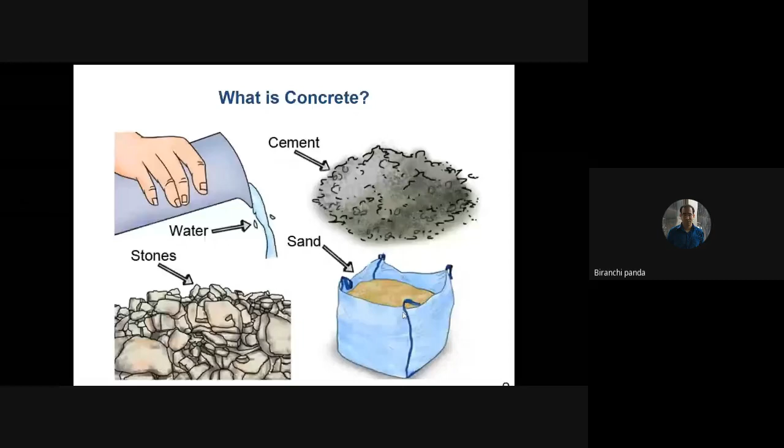Now, if you want to create a structure using concrete, what is the basic step? Normally, like in casting, we create the mold. So similarly, in civil engineering also, we create the mold to erect any structure.

So what are the problems here? We found a very interesting statistic that over the past years, the productivity of the construction industry is quite stable. It is not improving or increasing compared to other manufacturing industries.

Then we decided, how can we bring more digitalization to automate the fabrication process in construction, so that we can print our future homes more efficiently and make it also quite affordable.

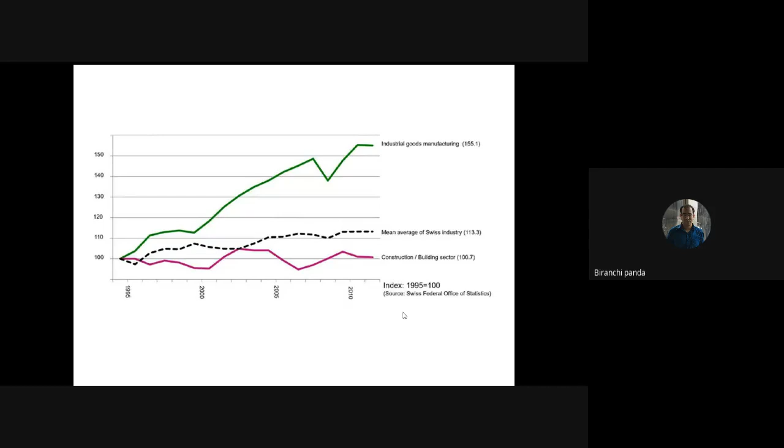Since we came up with the statistic that productivity in the construction industry is not improving over the years, we started to investigate what are the main causes behind it. We realized that lack of automation or digitalization is one of the key barriers for improving productivity in the construction industry.

Apart from that, since the building structures surrounding us are mostly made of concrete material, and concrete—especially the cement used to create it—is also responsible for global CO2 emissions, that is another main problem when you want to create something with concrete material.

The third problem we see in construction is that the laborers or workers are working day and night, exposed to unhealthy conditions which are not good for their health, and sometimes these workers who create your buildings are exposed to a very risky environment.

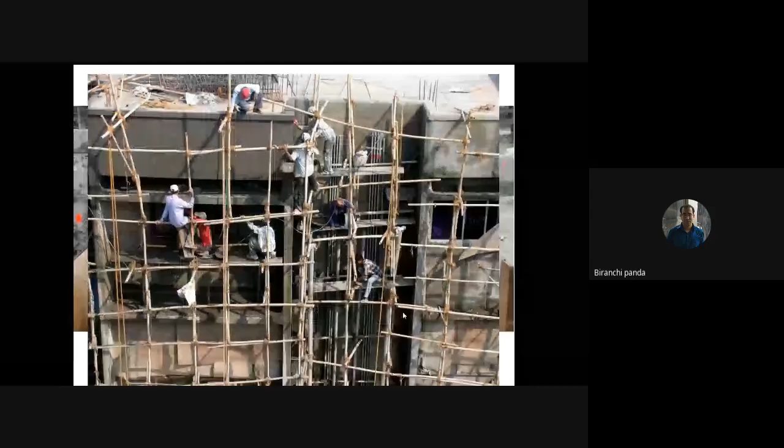With this kind of thinking and background knowledge, we started to consider how we can implement digital technology in creating buildings, so that the laborers or workers in this field can be shifted to high-skill jobs. For that reason, we started working on 3D printing of cement or concrete-based material.

So why print concrete? To answer this, I have two key points. The first benefit of printing concrete, from my perspective, is design freedom. I hope all of you know this feature of 3D printing, that we can print any complex geometry and we don't need a mold to create such complex structures. Similarly in 3D printing of concrete, we can create very complex structures—we have the freedom of design.

This picture I borrowed from a French company who were printing concrete. You can imagine the degree of complexity involved in this picture, and I'm sure it is very difficult—or I can say impossible—to create such structures using conventional casting methodology. So the first advantage we get from printing concrete is design freedom.

We can print any design and do not require any mold to create these kinds of structures, because in 3D printing we deposit material layer by layer. We just need the CAD model of the structure. Once we have the CAD model, we can directly print it, and we do not require any mold to erect this kind of structure.

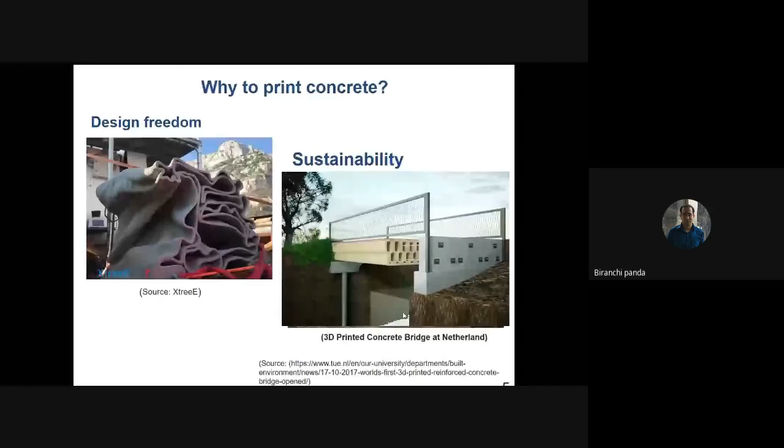This industry is a very big industry - it contributes 6% of global GDP, a $10 trillion industry. But if you look very closely, construction projects are mostly 20% over time and 80% more costly.

Today, if you want your own building, you go to the builder, they will quote some price, suppose X. After 2-3 years, sometimes the estimated time duration cannot be achieved, and due to overtime, the building prices become more expensive.

If you look into the reason behind these price fluctuations, you can see we have very few automated devices used in construction. If you see the percentage of robotic systems used in our constructions, only 0.2% robots are being used. That said, there are many advanced equipments construction people are still using.

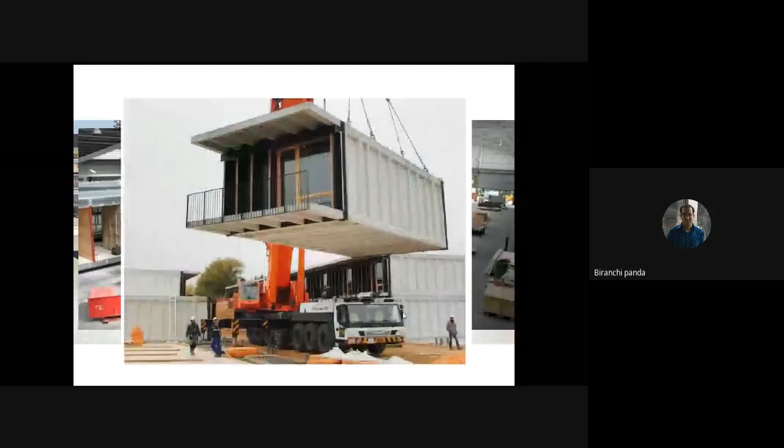We have some machines that can simply lay down bricks. We have machines, or a factory of the future, where we can create the entire building - an example of precast companies entirely building the structure, and once ready it can directly ship to your place for installation and use. It's a very simple and affordable way of making concrete structure - everything you need is created in a factory, and once ready, you directly install it on site.

To track the progress of construction planning, management, and costing, we have also been using advanced software called building information modeling, where all these progresses are captured.

Recently, as I was mentioning, the World Economic Forum presented the scenario of the future of construction, where all these automated techniques will be connected to the internet through IoT devices. If you look closely into this picture, you'll find that 3D printing or additive manufacturing is also considered one of the future technologies to be implemented in the construction sector.

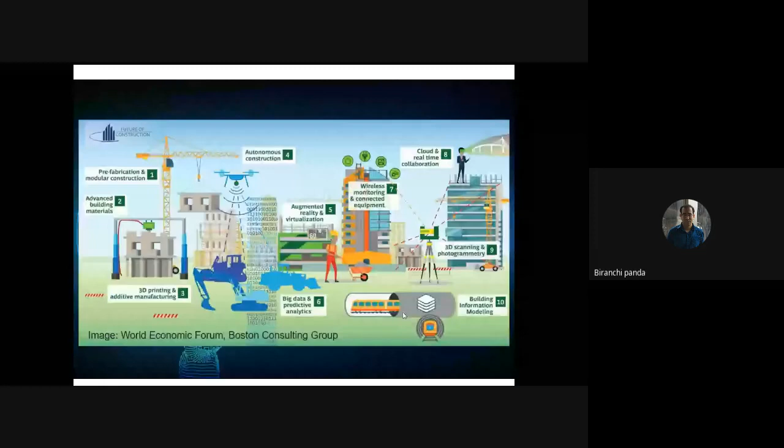So let us come to 3D printing of concrete structures and understand how it works. Before I start, let me play a very short video - almost 80 years old - but you can get a feeling of concrete printing just by watching it. Let me play it for you. I hope you are able to see it.

On October 20th, 1941, he applied to the U.S. Patent Office for registering a patent for a wall building machine.

The person whose time was devoted to the invention of equipment for the food industry is the author of the first building 3D printer. He created a prototype. So you can see that 80 years back, these people already knew 3D printing.

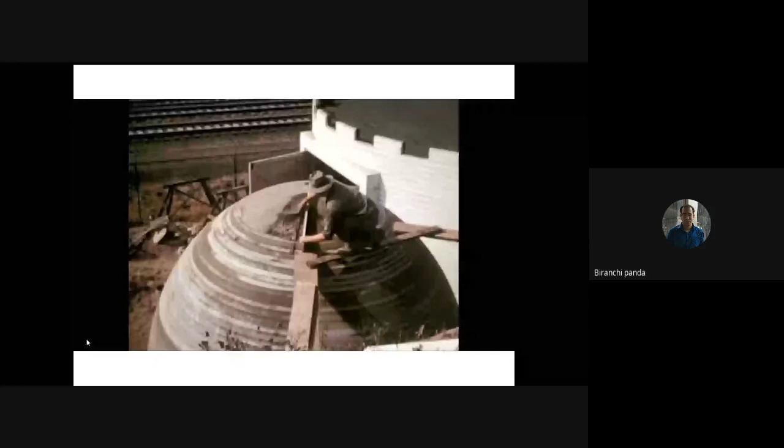They could create structures using a machine that deposits not concrete, but something similar to soil or mud kind of materials, layer by layer.

After 80 years, if you look at the same scenario, it looks something like this. This is a company, Apis Cor, from Russia. They claim to have an advanced 3D printing system that can print an entire building in less than 1 day. I'm not trying to humiliate any companies, but at the same time, I'd like to mention that in 80 years we've only improved our mechanical machines.

The machine they were using earlier had a lower degree of freedom, but with this kind of crane-like system or robot, we have more degrees of freedom. So in terms of machines and instruments we have improved, but the underlying technology remains the same. Even now, the construction industry is adopting this kind of technology.

We started working with this concrete printing technology. I'll show you one video, but before that, let's look at the schematic of this concrete printing research. When I started my PhD in 2015, there was a lot of interest from both academia and industry to work on this topic.

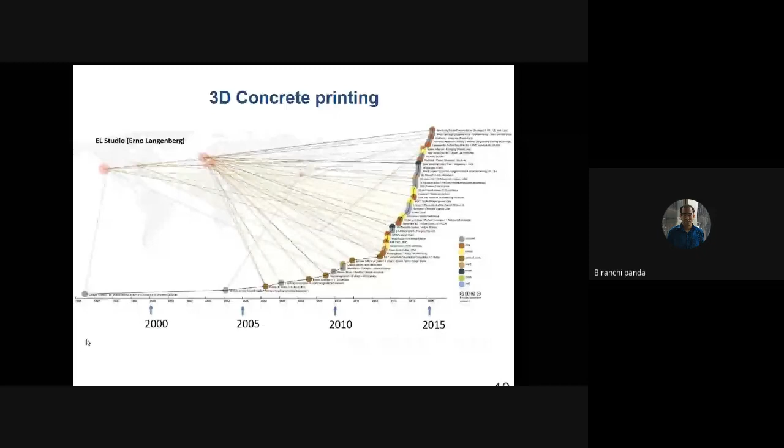The industry was trying to adopt this technology because they found it could help create affordable homes compared to regular casting methodology. So this is the video of concrete printing. Let me play it. It is similar to an FDM based technology.

Those with a 3D printing background can easily see that it's similar to fused deposition technique, where we deposit the concrete layer by layer. It's just like the FDM process, where we deposit molten plastic layer by layer. Here we don't need to melt it, but concrete by its own nature can be molded, and we can deposit it directly from the CAD model.

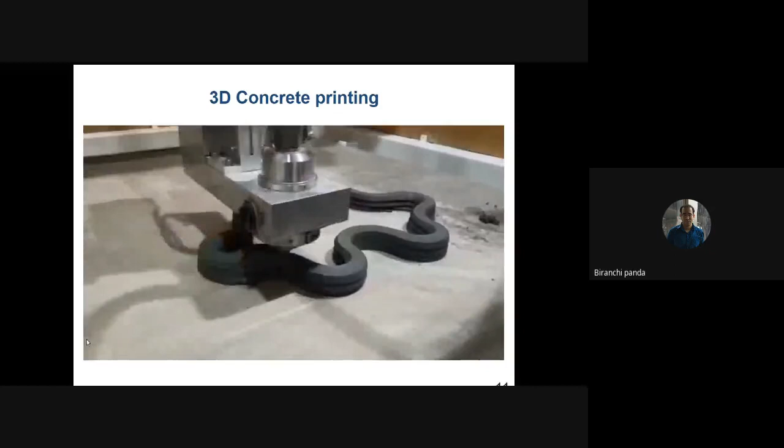So the process starts with a CAD model. This is the printer we used to print this structure. It's a customized machine, because when I started my PhD, there was no machine available for printing concrete, so we made our own.

It is a 4-axis gantry printer. The X, Y, Z axes are visible, but there's also a rotational axis, you might have noticed the nozzle rotating during printing of the structure. We count that as the 4th axis, so this is a 4-axis gantry kind of printer.

It's a very simple process, but let's look at the challenges when you want to print this kind of material. These challenges are very common even in fused deposition modeling, or generally in all kinds of extrusion based 3D printing processes.

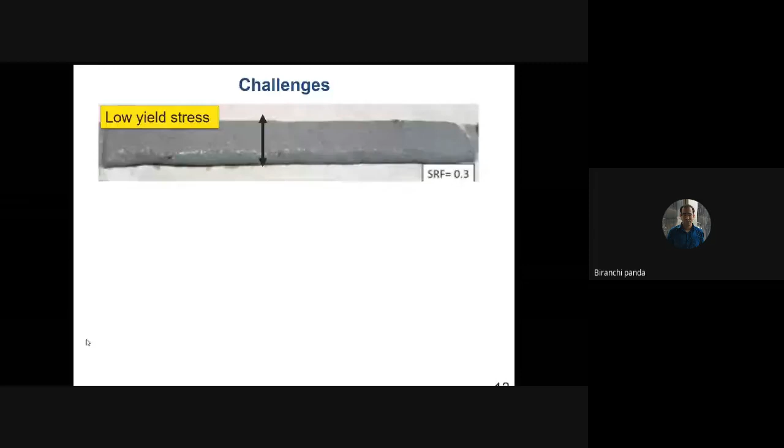So with some chemical modifications, we can create a slightly more stiff mix for this printing application. When you make it more stiff, we'll see that because of high viscosity, the layers will be discontinuous in nature. When you are printing, it will be fragmented.

So neither do we need the material to have a very high yield stress or viscosity, nor a low yield stress, because when you have low yield stress, it will simply flow away and not retain its shape. And when it has high viscosity, you will get discontinuity in layers. So we need to have an optimum material combination to print the material.

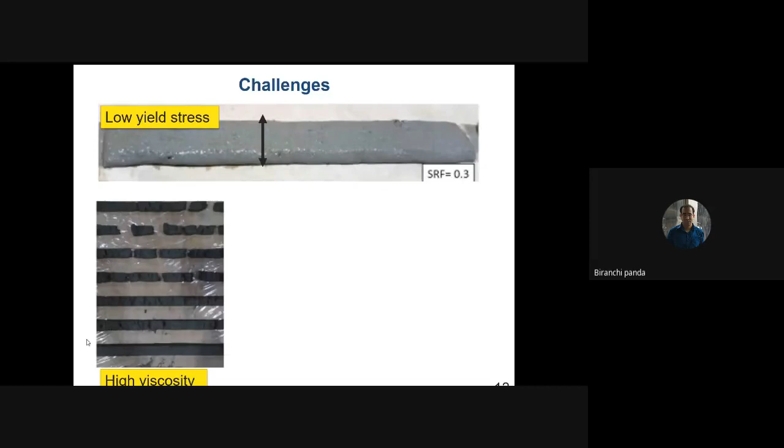So we have to properly create a balance between yield stress and viscosity, and thereby come up with a printability window where these mix combinations will be printable. When I say printable, it means the material should be extrudable while maintaining its own shape, and buildable. We need to also deposit more layers. So how can this be done?

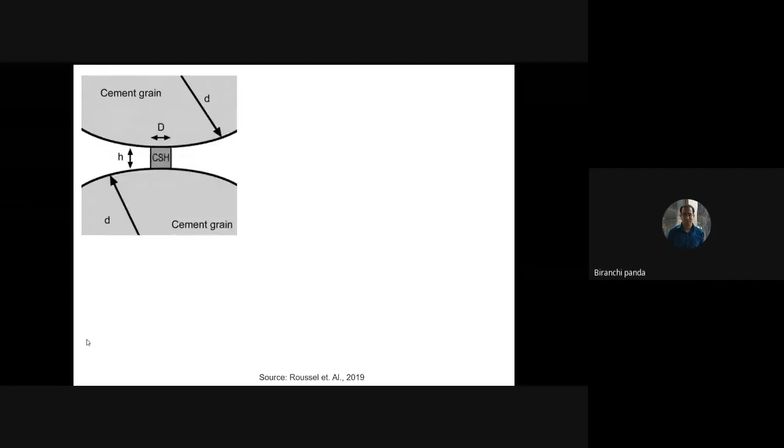Normally for regular construction, we use Portland cement, or simply cement. Cement has its own mechanism to create this kind of thixotropic material. I am not going to explain this complex keyword now, but I have some supporting slides, and in the subsequent slides I'll explain it in a better way. Cement has a property where if you simply use cement, you can deposit some material, and to deposit more layers, you need to always control the yield stress of the material.

But our goal was to create a more sustainable mix design. So when we wanted to create a more sustainable mix design, we tried to identify what waste materials are available near us. Then we came to know that we have a power plant that produces fly ash, and when we look at the fly ash under a microscope, it looks like spherical balls.

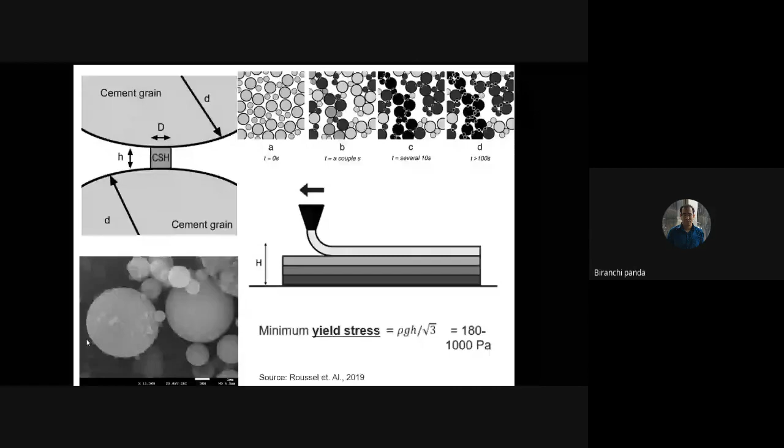So we tried to replace cement, because as you know, cement production is an energy intensive process and it emits a lot of CO2 to the environment, which is not good because it causes greenhouse emissions. So we wanted to replace cement partially with fly ash because it is an industrial waste, and we also wanted to create a more sustainable mix design.

But as I said, whenever we saw this fly ash under the microscope, we could see that the particles are like spherical balls. So what happens when you want to replace cement with fly ash? Because these are ball-like spherical particles, they have a high tendency to roll over. They can easily flow away. So ultimately, when you replace cement with this waste material called fly ash, having spherical particle size, they can easily flow away.

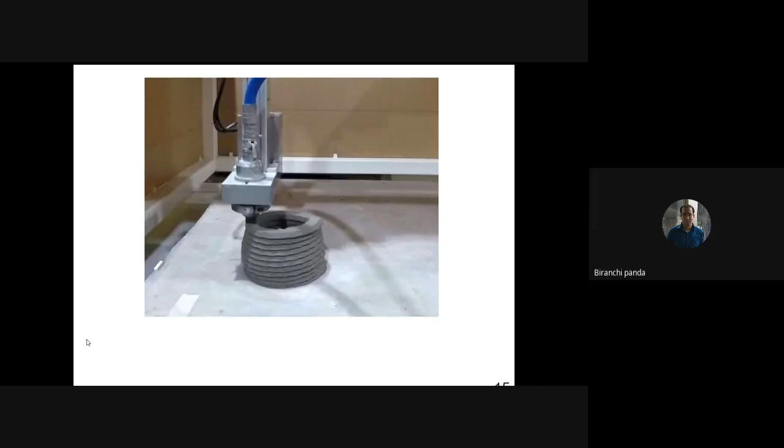So after deposition of 3-4 layers, the whole structure is going to collapse. As you can see in this video, because of the high flowability or low viscosity, this structure is going to collapse. Even when we tried other structures, after printing a few layers, the whole structure collapsed.

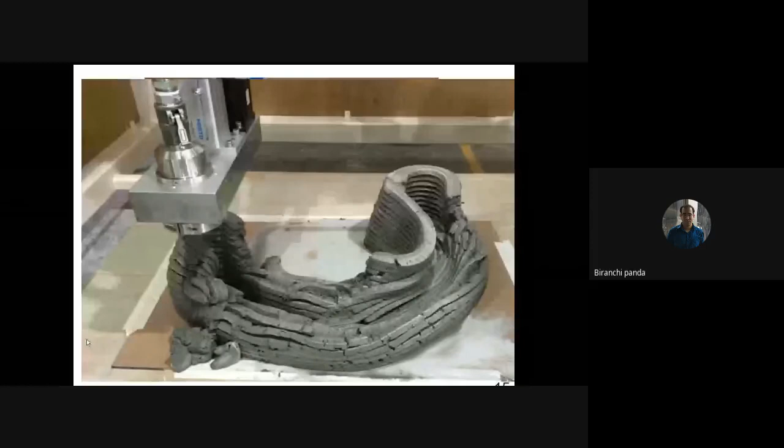So to improve this problem, to improve this material combination, we tried to take the help of nanomaterials. Nanomaterials, though they are nano sizes, can do a very wonderful job. So we used a customized nano clay. We made this nano clay ourselves.

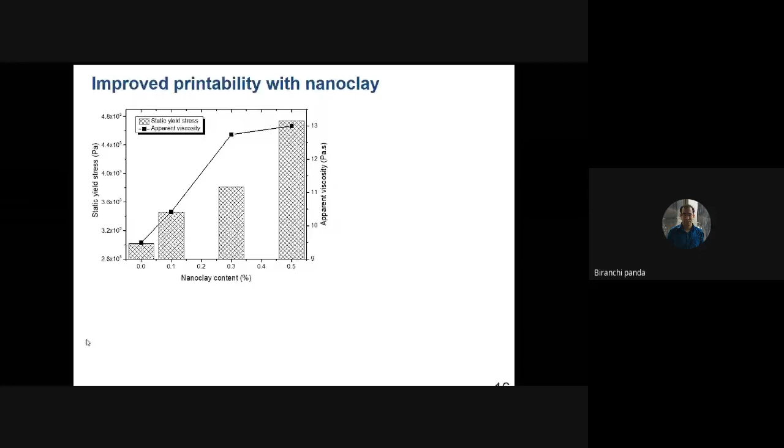We investigated the causes of why it got improved, and found there is a mechanism called flocculation. Because of that, these nanomaterials are able to improve the yield stress of my control sample. The sample I printed before collapsed, but now the same material has more yield stress and more viscosity, yet it's still in the printability zone, meaning I can print it without any discontinuity. There's a mechanism I won't explain in detail, but flocculation is happening here, providing the material with higher yield stress and viscosity.

Let us understand the process in more detail. During printing, we initially start with a mix at the mixer. Once you mix the material, it is at the mixer. Then we need to pump it, because the material needs to travel from the mixing point to the extruder or nozzle. So the next stage is extrusion, where we have a pump and we extrude the mix. After extrusion, we deposit it. So there are basically three stages in this printing process: rest, extrusion, and deposition.

Deposition is also counted as rest, because once you deposit the material, it is in a resting condition, but with time the material gets loaded with new layers. So there's a slight difference between the first and last stage. In the first stage, the material remains entirely in resting condition, but in the last stage, though we are depositing the material, it's not purely in resting condition because we keep adding layers. So the material in the bottom layer is exposed to some stress because of the top layers.

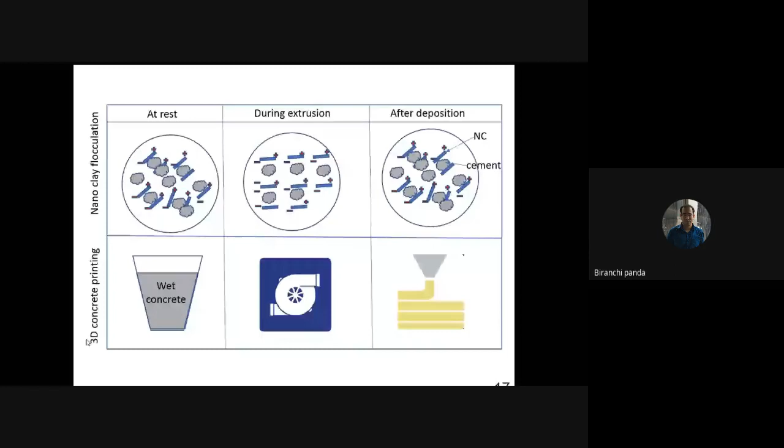We have to make this possible for printing cement or concrete based material. That was the main challenge while developing the material. But as I mentioned, with the help of nanomaterials, we were able to print more layers without any deformation. When the concrete printed layers started to deform, we classified their deformation, again taking the help of strength of materials.

Every time we work with a new system or new material, we always try to connect with a fundamental mechanism, whether from strength of materials or machine design. So we categorically say that the deformation process in the beginning is elastic deformation, but once the material crosses its own yield stress, we expect it to have plastic collapse.

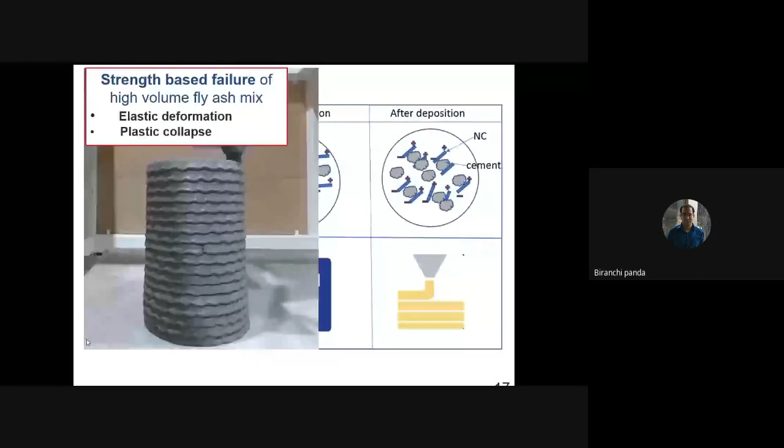To measure this deformation, we modified our printer. We attached a laser sensor to the extruder so that during printing, this sensor measures the deformation of the layer. This information is really helpful because we developed a feedback control system. When the material is going to deform, the laser gives me real-time data, and with that data I can optimize the material design and the printing parameters to reduce the deformation. This is like process control, improving how we can accurately map what's happening during printing and what changes are happening because of the material or the machine.

If we're able to capture it, we can design a better material and a better machine for printing a very tall structure. That was our goal. So for that, we made some modifications at the printer level, and then we were able to print the material.

As I discussed, during printing there are basically two stages: during extrusion and after deposition. During extrusion we need low viscosity material, and after printing we need high viscosity material. How is this possible? It's possible when you design a thixotropy material. What is thixotropy?

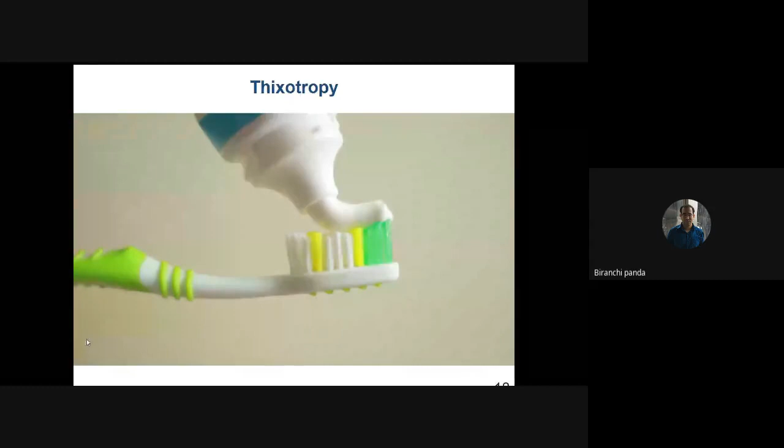So how do we measure this thixotropy property? It's a very simple process - we developed two protocols to measure this property. I just explained two points: one, you have to apply pressure, and when you apply pressure, force, or shear rate, the material loses its viscosity - it gets broken down. So first we classify the protocol name as structural breakdown. It means we'll see how different mix designs can be broken down under certain shear rate.

So for that, we developed this testing protocol where we apply high shear rate and see how the material breaks down. We can see from this image that there is initial shear stress, and once it completely breaks down, we have the final shear stress. If you take the ratio of this, you get an index, and this index tells you how fast you can destroy your material.

It is important because if you remember the 3-stage process, during extrusion we need the material to break down very easily, so that we have to apply low pumping force or pressure to extrude the material or deliver it to the nozzle. So this protocol or index helps you select your final mix design, which requires less pressure for extrusion. Now, since printing is not just about extrusion, we need to deposit more layers.

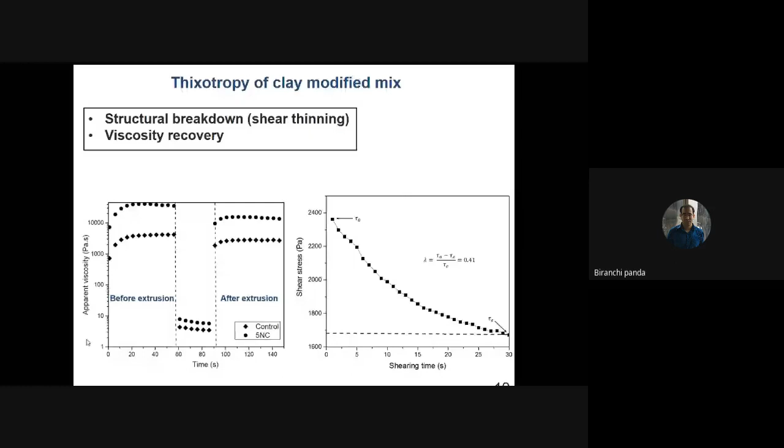So it is still well and good for our applications. We can deposit the material without having the behavior of flowability, because during extrusion the material completely loses its viscosity, but after extrusion it can recover its viscosity, and with this high viscosity we can print layers without any deformation. So whatever material we develop, we have printed more than 60 layers, and this is a very tall structure that we printed for one of our projects.

That project I am going to show at the end of my slides. So this is all about material development.

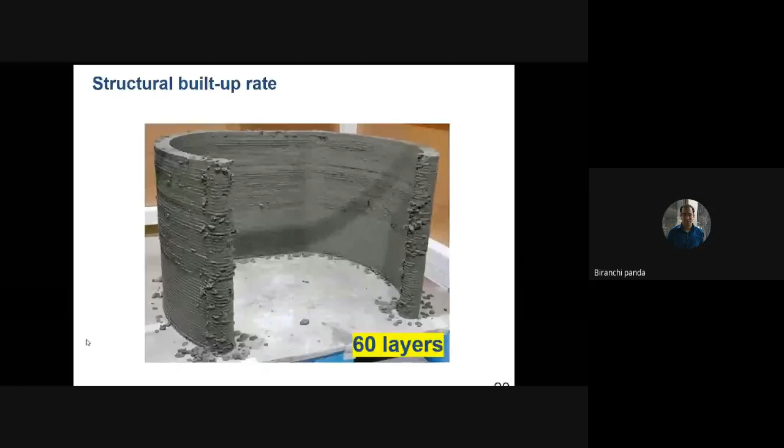Then we wanted to do some more experiments from a machine perspective. We came to know there is a competition by NASA. They wanted to develop a material to print habitats, or homes, for astronauts traveling to Mars or the Moon. The requirement was, how can we automate or digitalize this fabrication process? But the condition was the material should be developed in such a way that it needs less water, because in those environments we don't have the availability or freedom to use a lot of water.

So the key criteria was to develop a material that needs less material, less water. For that particular application, we developed a geopolymer material. Again, it's a more complicated matter, so I'll quickly skip these slides. But before skipping, let me give a very brief introduction to this material development.

So here we used some fly ash, GGBS, and some basalt material, since we came to know a similar composition was available on Mars - that information was provided by the competition organizer. We used basalt kind of material and made sure the compositions are similar to the material available on Mars. Then we created this geopolymer mix, where the activator or chemical component is used instead of water, since here we don't need a lot of water.

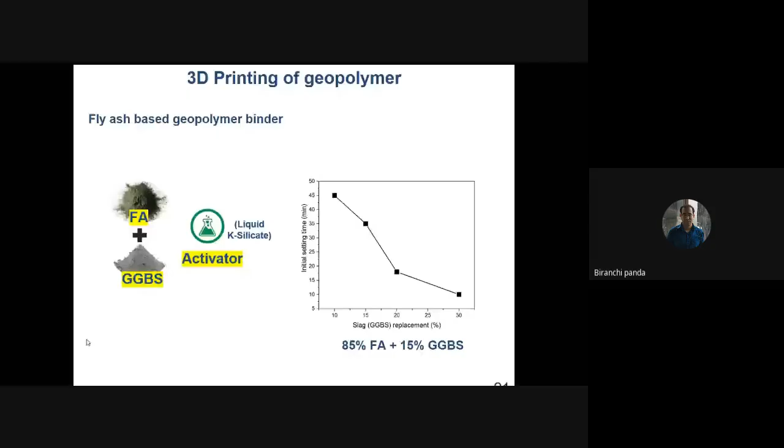Instead of water, we need an activator, which is potassium silicate, and we use this potassium silicate to make the concrete material, using byproducts like fly ash and slag. These come from different steel plants. And we investigated how we can design a printable mix design using this material.

Then we realized that the activator we use in our process is the main culprit, because activators are available in different concentrations, or different molar ratios, and different molar ratios of activator have different viscosity. As you can see in this picture, if you take 1.8, it has low viscosity. If you go for 2.0, it has high viscosity. So the activator viscosity is controlling the viscosity of my final material.

As you can see in the top two pictures, different viscosities of the two materials have been recorded. When you use an activator of high concentration, you end up with a material of high viscosity. When the material viscosity is good, you can print a very well stable filament. But in the case of 1.8 molar ratio, since the viscosity was quite low, we can see that after extrusion, the layers are simply flowing away.

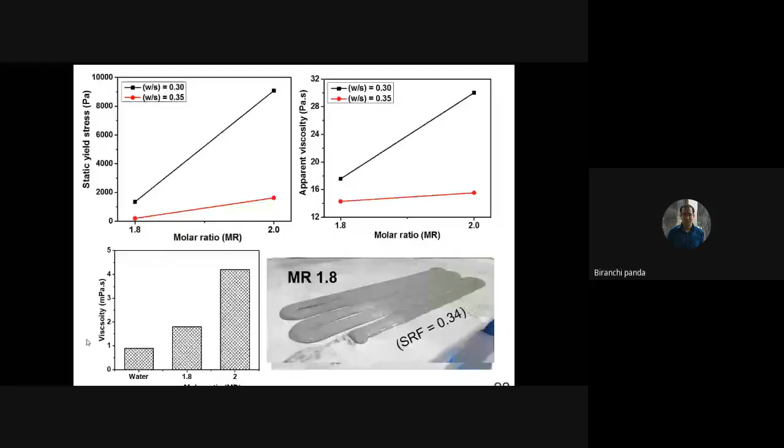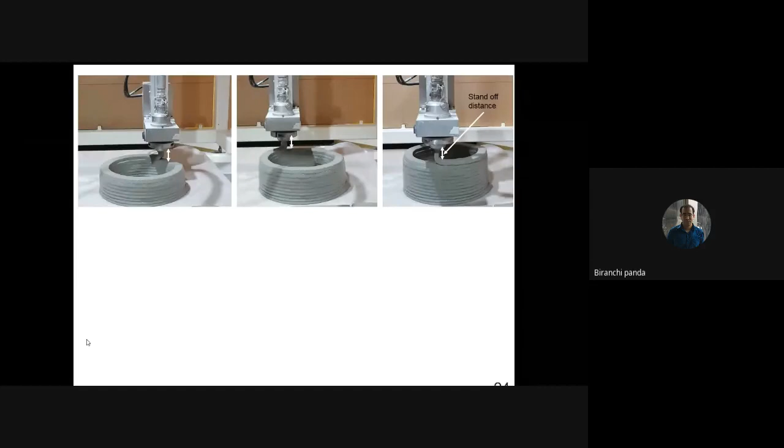So then again, we took the help of nanomaterials. We improved the material combination by changing a lot of parameters, and did a lot of chemical tests that I don't want to explain in this slide. But the key improvement we found was that during printing, if you don't use any nanomaterials, or simply use the control mix, after printing some layers you will see deformation. But with the improved material combination, the material does not deform, because there is no gap between the extruded tip and the material. In the initial picture, you might have seen a gap between the top layer of material and the nozzle, but in this case, we don't have any gap between the nozzle and the material. So it means my machine is moving according to the G-code, and the material is not slumping at all.

So again, we did thixotropic characterization, and printed some structures to make sure we are able to print this material up to a certain height. So this is the video that we sent to NASA for the competition. I hope you can see it.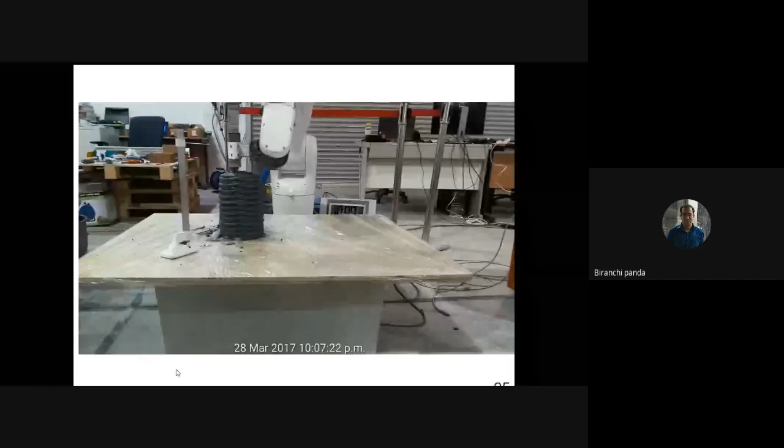As you can see in this application, we wanted to use a robotic system. The program was made because we thought that in that very harsh environment, we should not use a gantry system, since it needs a lot of installation. A robotic system mounted on a movable platform can be more effective in such applications. The same material was printed in 60-80 layers to demonstrate that the material is still printable without any deformation or defects.

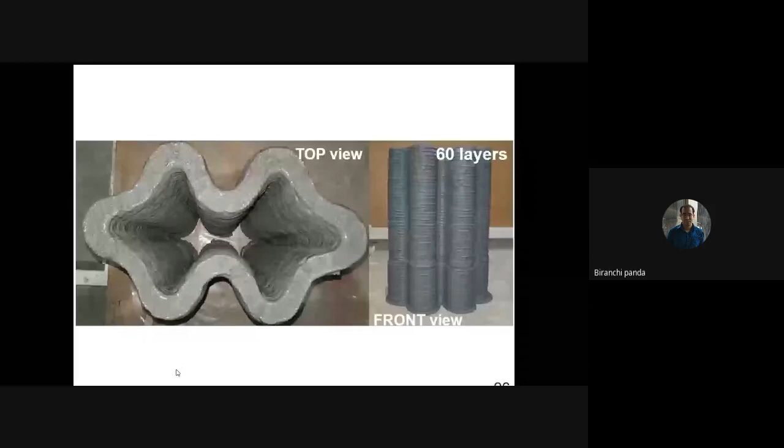Now this was all about material development, but when we are targeting to print affordable homes, the situation is quite different, because for printing homes or tall structures, we need to redesign the material in such a way that we can print a 2-3 meter tall structure.

So whatever material development we have done here needs some slight modification, as highlighted in this picture. It tells that when you want to print a tall structure, you have to use the concept of FDM printing. It means that as soon as you deposit the material, it must be hardened so that you can deposit more layers. If you want to print 10-20 layers, you may not have to harden the material quickly, but if you are targeting 2 or 3 meter tall structures, we have to find some mechanism so that once you deposit the material, it will quickly harden, and then you can deposit more layers.

So how does it happen? Here is the schematic of the 3D printing system. At the extruder, we try to add some chemicals, which we call accelerator. They usually do some changes in the material chemistry and try to create a rapid hardening mix. Once you deposit this rapid hardening mix, you can deposit more layers without any fear of collapsing the entire structure.

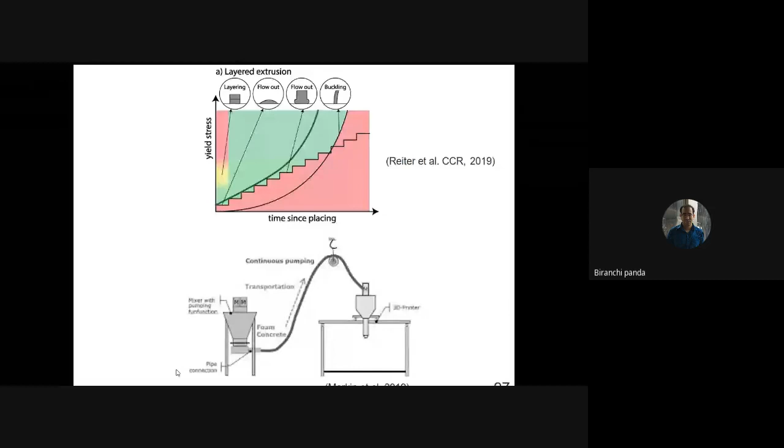We later realized that when printing these tall structures, the material is subjected to compressive strength. For that, we modified the uniaxial compression test that we regularly do for solid material. Instead of solid material, we put in a fresh material and tried to see how much load this material can take with respect to different time, because you have to be very sure that at every point of time while printing a tall structure, the material is changing.

We also wanted to capture the material behavior changes with respect to different times. We initially took the fresh mix and compressed it at 5 minutes, then repeated the same test after 150 minutes, because we know that if we are printing a tall structure, we'll still be printing material after 150 minutes. We wanted to see what changes happen to our material once it crosses 150 minutes. For that reason, we conducted this green strength test.

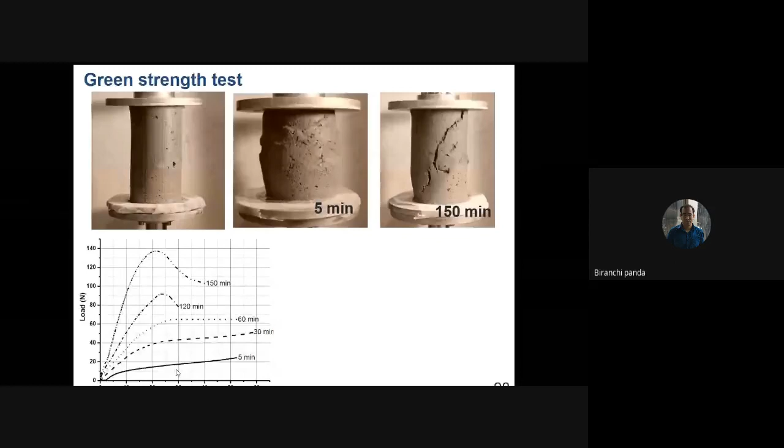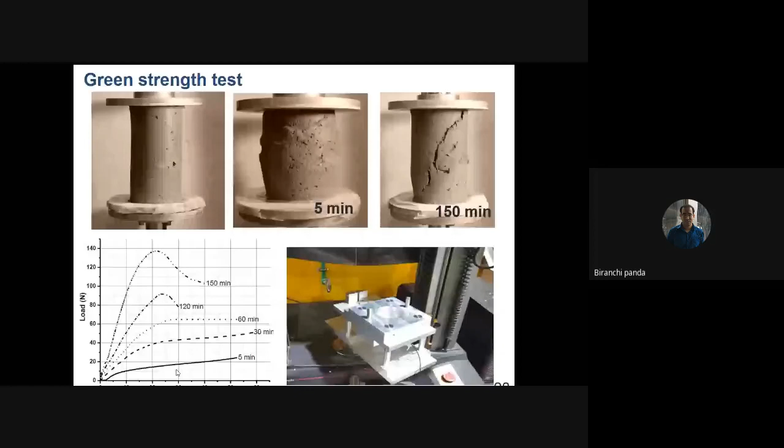Then we did some direct shear tests, which give you the shearing property of the material. Using the compressive strength and shearing strength, we developed a model in collaboration with another university in Australia. This model is very helpful because now we have a tool to predict when the material is going to collapse. It's very useful because when printing a tall structure, 3 or 4 meters, if after completing 2 or 3 meters the whole structure collapses, it's a nightmare. So we developed this modeling or simulation tool to predict, before you print, when the complete structure is going to collapse.

This information is useful because accordingly you can design your material or set your printing parameters so that you can avoid collapsing of the structure. So let me show this video, how it has been done.

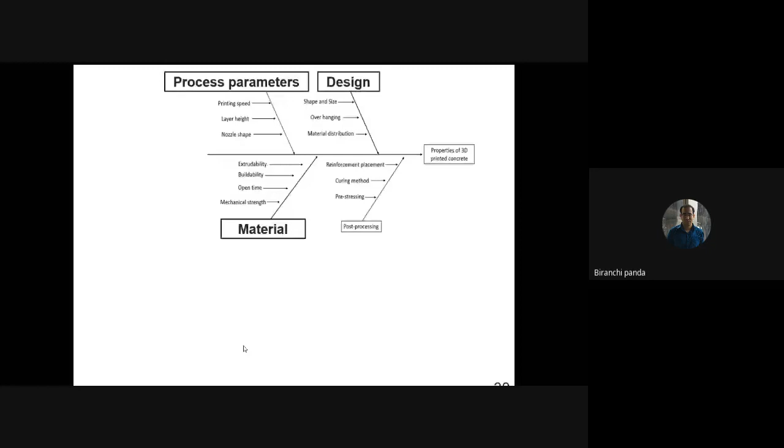We printed this material at different printing speeds while keeping the flow rate constant. When the flow rate was constant and you change the printing speed, you will find an optimum printing speed at which the layer width and dimensions will be similar to your nozzle dimension. We consider that the optimum speed, because at other speeds there will be either over deposition or less deposition of material.

For that reason, we conducted different printing speed experiments, keeping the flow rate constant, and tried to identify for different materials what is the optimum printing speed so that the layers will not be deformed, and there will be no extra or less material in the filament. So printing parameters also have some impact on the filament property.

Next, what about the nozzle shape? Normally in 3D printing we use a circular nozzle, but if you use a circular nozzle, you will end up having a lot of porosity in your structure.

Here the science of combining material and process parameters comes into picture. If you still want to use a circular nozzle, you can reduce this porosity by changing the material behavior. Even with a circular nozzle, you can make the material slightly less viscous so that when the layers are added, they bond together and you can reduce these macropores.

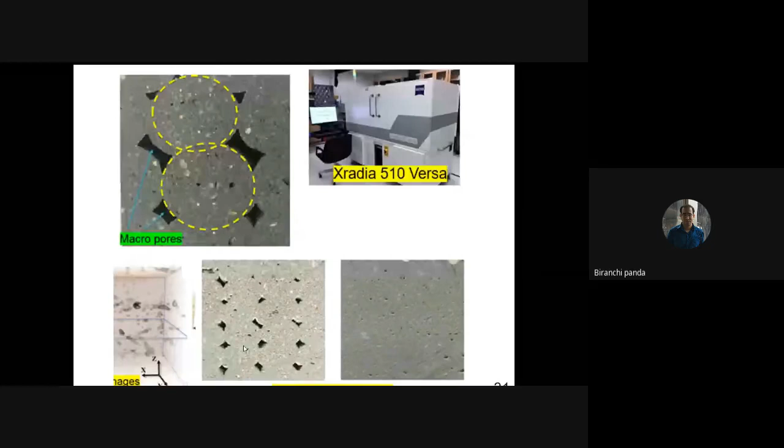Next comes printing design, because I just discussed the connection between material and process parameters. The third important property related to these two is design. So what I want to conclude is that in 3D printing, your material, process parameter, and part design are all correlated. You cannot simply optimize one parameter and expect the best result, because all three are interconnected.

So how? Let us see this example. We wanted to print a toilet unit with 1.8 meter height, and when we designed this toilet unit, we found that we have a corner at some section. Now we wanted to print this corner.

There was an argument about what is the best radius. For a very small radius, we see some tearing effect on the layers. If we increase the radius of curvature, those tearing effects will be nullified.

So here I am not talking about material or process parameters. Rather, the design of the structure is very important and it can severely affect the property. As you can see, if we want to make a very small radius of curvature, you will be having a tearing effect. But this problem can be solved if you optimize the process parameter or the material, because these three things are related: material, process parameter and structure.

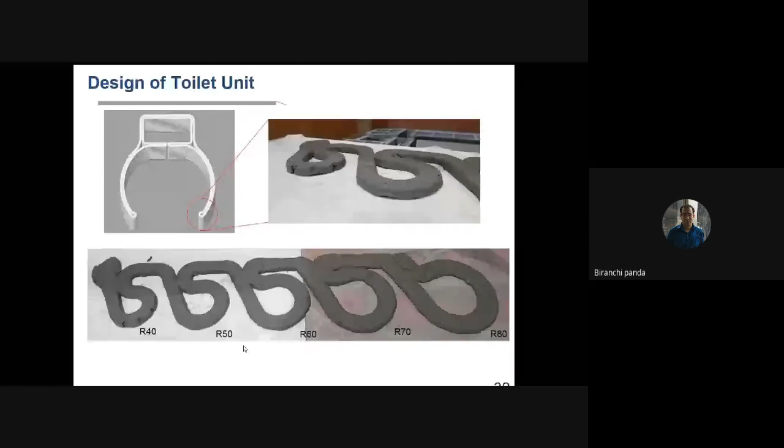And finally, when you print everything, we have to go for mechanical property testing. So what we do, like in 3D printing, as you know, the parts that are being produced are not isotropic, they behave as anisotropic. It means that they will be having different properties in different directions.

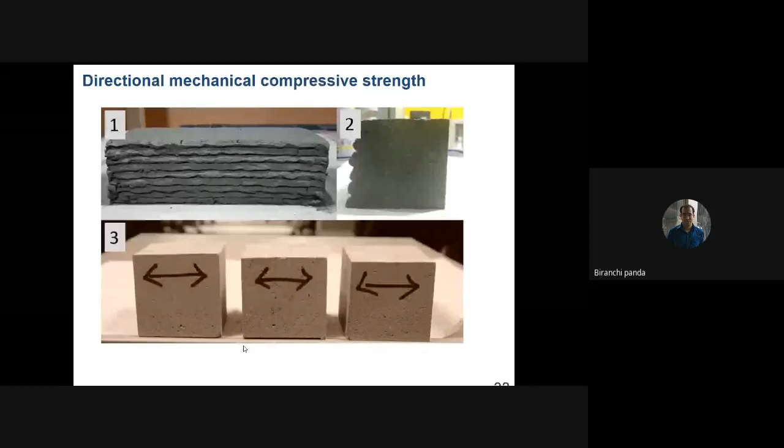So to confirm that, what we have done, we have printed the sample and collected different cubes, because these are the standard cubes for testing compression. We extracted the cubes and applied forces in three different directions: F1, F2 and F3. As you can see, those loads have been applied in three different directions.

But fortunately, we didn't see any kind of anisotropy. I will say it's not much anisotropy, because compared to the casting, mentioned as C here, the property in three directions are almost similar. Though there is a slight variation in the property, almost this property is quite similar to the casted sample.

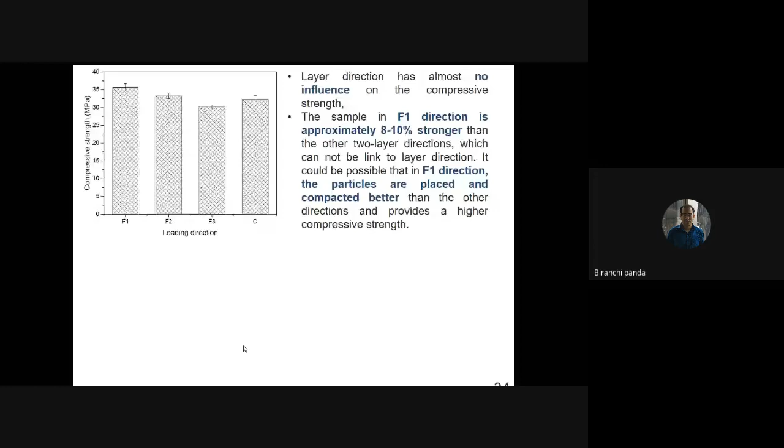But what is most important, when you are going for 3-point bending testing, what happens is either the layers will be in this direction or in the same direction as loading. So when the layers are in the same direction of loading, another property comes into picture known as interface bond strength. Because in 3D printing, we are depositing the layers one by one, so the interface bond strength between these two layers is very critical, and it is going to severely affect the F1 direction.

So for that reason, we started to investigate the tensile bond strength between two layers. We printed the material and investigated this property by changing the material, time gap, and process parameter.

Suppose you are doing a very large scale printing. You print one layer, it takes about 1 minute. Now for printing another layer, you have to wait for 1 minute. So it means the time gap between these two layers is almost 1 minute. Similarly, if you print a smaller object, the time gap can be reduced. So we tried to investigate how this time gap is affecting the bond strength.

As you can see in the results, with more time gap, the strength becomes very less. But what is more interesting, it also depends upon the material. If you are using a rapid hardening material, even some 10-second delay will create a very poor bond strength. But if you are using a material having some 10-20 minutes setting time, a small delay can still provide average tensile bond strength. So again, the time gap is related to the material and process parameter.

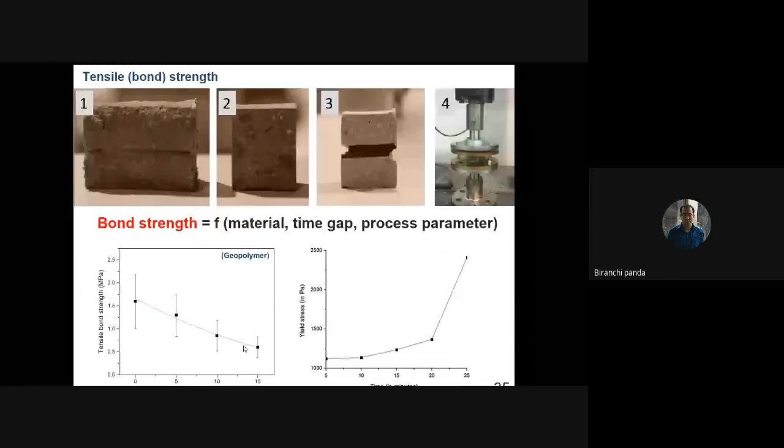How does process parameter affect this bond strength? For that reason, what we have done, during printing, if you slightly press the material, and if the material is slightly softer, these pores can be minimized, because these pores are the main critical points creating very poor bond strength. So during printing, if you can slightly optimize the process parameter, these pores can be minimized and you can expect very good tensile strength in such cases.

So again, I repeat, in 3D printing, every time we see that 3D printing parameter, your material design and structure, all three are interconnected. So with all this knowledge, we started to do some projects.

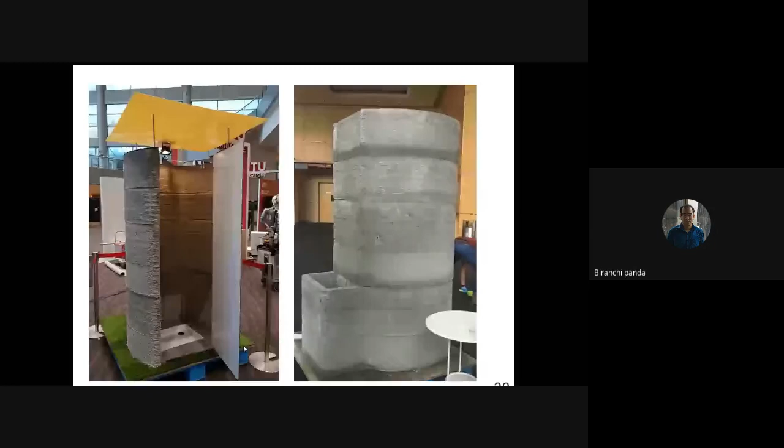Our first project was 3D printing of a toilet unit. I remember it was a World Toilet Day, and we invited our Prime Minister to inaugurate this structure. This is a 3D printed toilet, printed in just about 60 minutes to 1 hour. Normally, if you do casting, it takes 3 to 4 days to have this kind of structure. Our Prime Minister gave very good comments and appreciated our work, saying that this kind of digital construction technology can really provide affordable or timely structures for many reasons.

The next project we did is all about 3D printing of a bathroom unit, which was the key topic of my talk today. As I said in my first slide, we want to move from project-based to product-based technology. It means if tomorrow you want to create a building, you should not wait for the land, you should not wait for the construction, you should not wait for the local constructor to bring you the material to erect everything. With digital technology, we can create the entire structure in a factory, and you just come and select the kind of structure you want, and it will be directly installed on site. That's a product-based approach instead of a project-based approach.

To satisfy that goal, we tried to print a bathroom unit, because in Singapore, all buildings are fabricated off-site. They don't create the building on-site; they create it off-site in a factory, and then install it on-site. So to bring a 3D printing effect into that construction process, we proposed to print the complete bathroom unit and then install it on the building site.

For that, we purchased a new robotic system, which is now being used to print this 3.2 meter tall bathroom unit. After printing, we fitted all the facilities, and now it is ready for testing and installation. This is the complete bathroom unit printed using the robotic system you can see in this picture. I have a video, so hopefully you can see the complete process here.

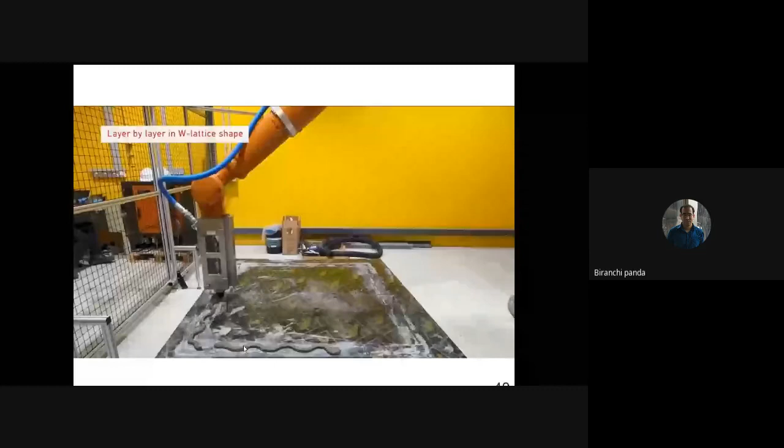Now, as you can see, after printing, the structure was tested at our Building and Construction Authority for many other tests, because they have to provide authorization to use this kind of structure in any building application. If you look at these 3D printed structures, they are more like a lattice kind of design, which makes the entire structure more lightweight and also saves a lot of concrete while printing this kind of structure.

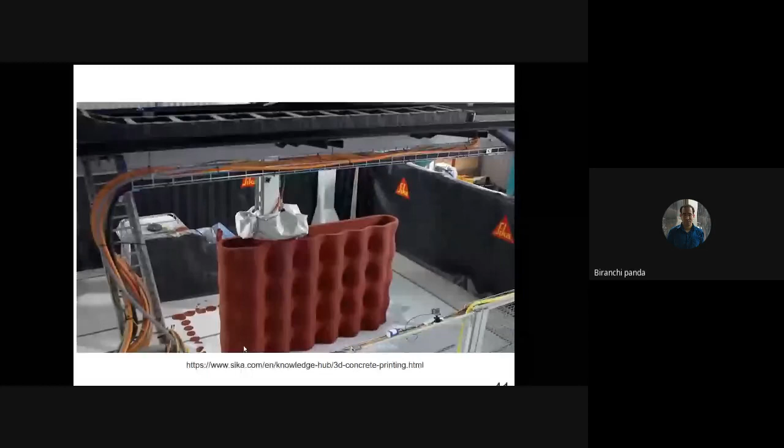Now the main problem or main challenge is all about reinforcement during 3D printing. We know that concrete is a brittle material, and we need to improve its ductility property. For that reason, we tried to design a nozzle in such a way that it can introduce reinforcement, in this case a steel cable, during the printing process. This nozzle deposits the steel cable along with the material during printing. Once we printed this material, we got a very good result in terms of the load versus extension curve. So somehow we managed to reinforce this steel cable reinforcement in our material.

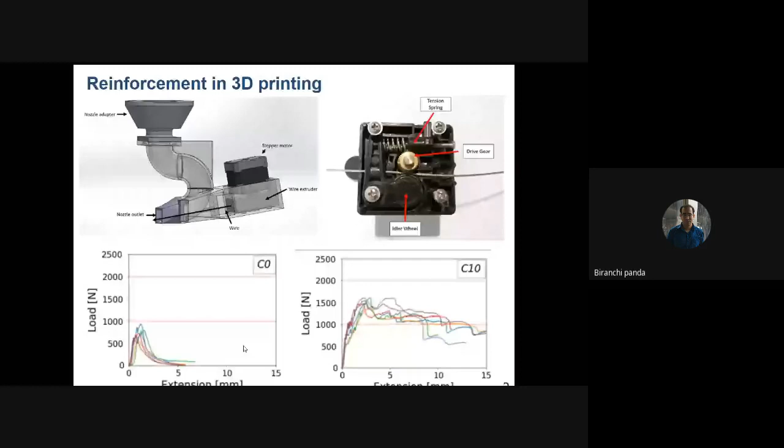But in the literature, there are many possible ways to do this. After printing, some install rebars, or print over the rebars directly. There are different approaches by which reinforcement has been added to concrete structures, and there is also some research on this.

We have also printed some fiber reinforced concrete. It's fairly easy; we just have to optimize the mix design so that the robotic system can print this kind of fiber reinforced concrete by adding fibers. But since this is an extrusion-based process, we found that these fibers align along the printing direction. Once you print the filament and break it under the microscope, you can see that, because of the high extrusion pressure, these fibers are always oriented in the direction of printing.

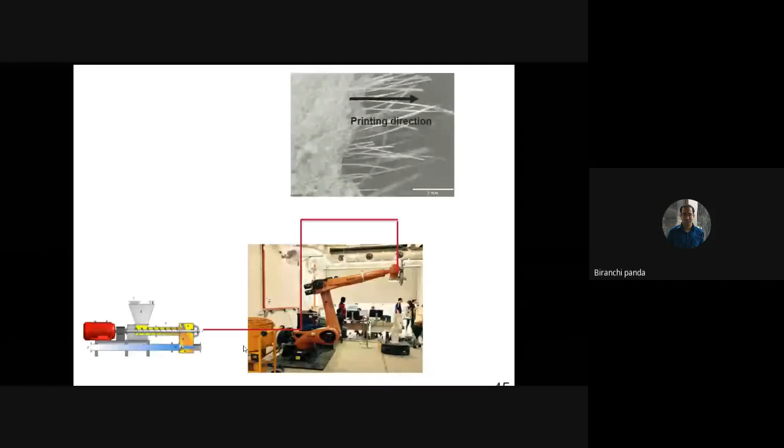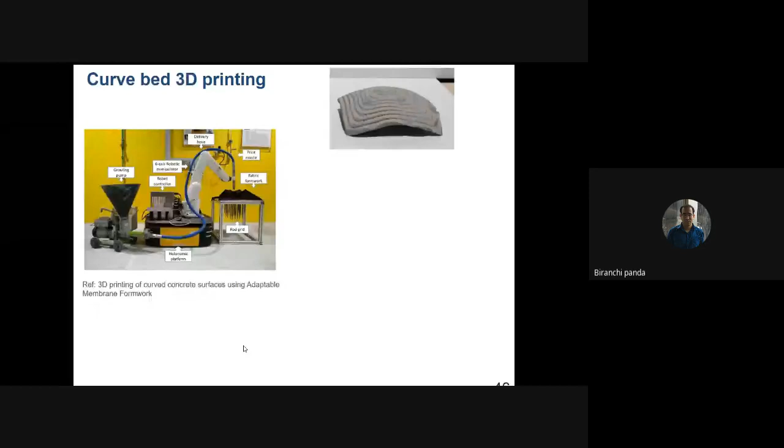With some colleagues, we started doing 3D printing over a curved bed, because previously we printed on a flat bed. Now we wanted to print on a curved bed. So the same robotic system was used to print on the curved bed, and the program was adapted to print on such a curved bed and deposit the concrete.

Whatever structures we are going to create, it does not require any mold. If you want to create such a complex structure, definitely we need a mold. But now with 3D printing technology, just by reprogramming and properly designing the material, we can print such complex structures.

What are the applications? We are trying to create building facade materials. Nowadays these facade materials are more like intelligent materials - they can absorb sun rays and provide power to the building. So we thought, let's print this complex geometry, because casting this element needs a lot of time to create the mold. We can easily print these structures with our 3D printing setup.

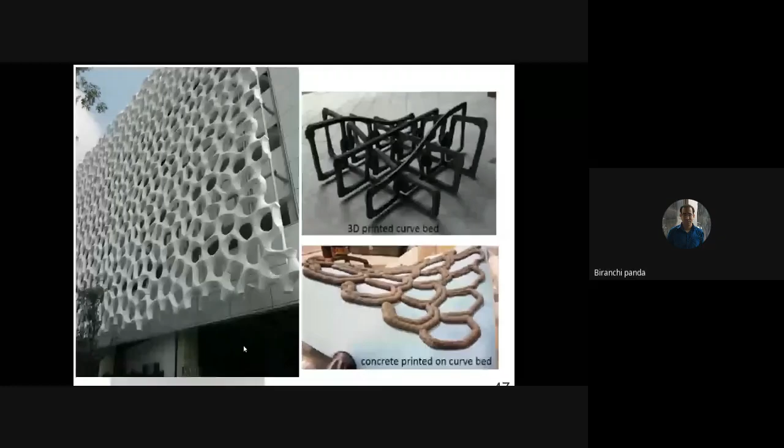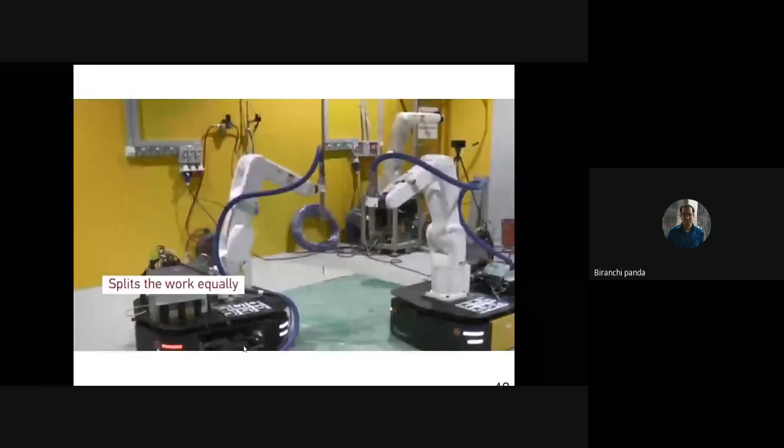Sometimes when the structures are very big, we have to take the help of multiple robots. These two robots can work together to print the entire structure, as you can see in the video. That is also part of our automation technology.

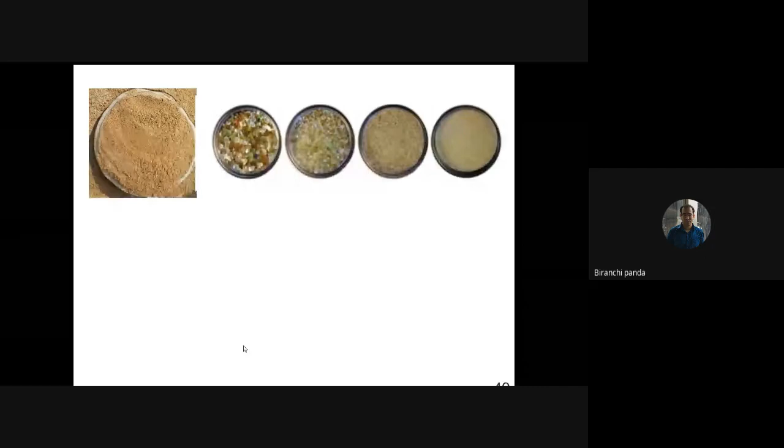Then we again started to work on more sustainable material. There is a supplier from Australia who provided us recycled glass - they crushed beer bottles and provided this recycled glass in different particle sizes. Just to replace sand, we tried to use this recycled waste product in our 3D printing material. We optimized the combination so that after depositing more layers, the material should resist more deformation force. Here the particle size is very important.

As you can see, these glass particles look like angular particles. If you optimize the distribution of these angular particles - and we've done some simulation to properly arrange this material - they need more force to break down under compression. So this is the material we are testing, and we finally came up with an optimum mix design where these angular particles are arranged in a framework that can take more load compared to sand.

Sand is definitely natural, but in some places we don't have availability of proper sand. For those regions, we can use these recycled materials and simply replace sand for 3D printing applications. The more interesting research here is how you can come up with a plan so that this material can take more load compared to the regular sand mix design.

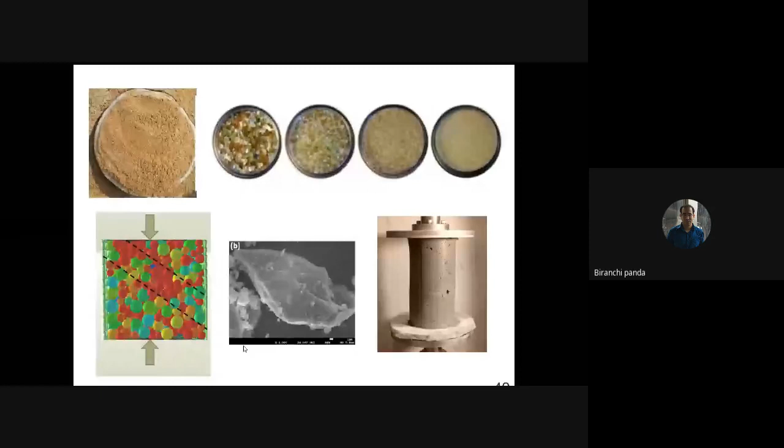So now I'm coming towards the end of my talk. I just wanted to show some construction 3D printing projects in the world so that you'll have an impression that this technology can be really helpful in creating affordable and timely structures compared to our regular construction process.

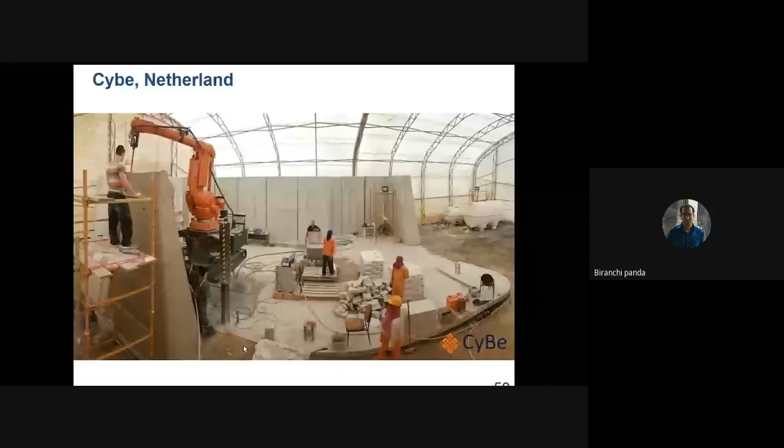This is a company from the Netherlands, and now they are creating building blocks in Dubai. This is another company, XtreeE - the same robotic system has been used, but they have designed a new nozzle system where they can mix multiple materials and print more complex structures.

I truly believe that if you want to create these kinds of building components using casting, it is much more time consuming and costly. There are some designs that I believe are very difficult or impossible to create using a casting approach, but 3D printing has the capability to fabricate those kinds of complex geometries.

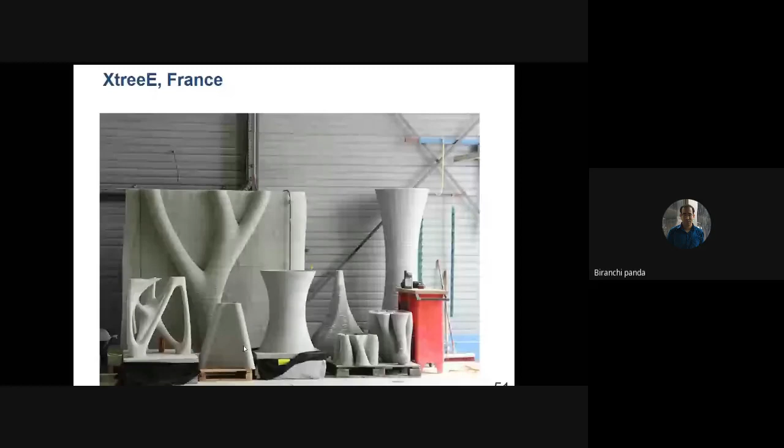Recently, they completed a project for the municipality - this is a rainwater harvesting unit. Previously they cast it, but now with 3D printing technology, they can make it more lightweight and print it in much less time compared to casting.

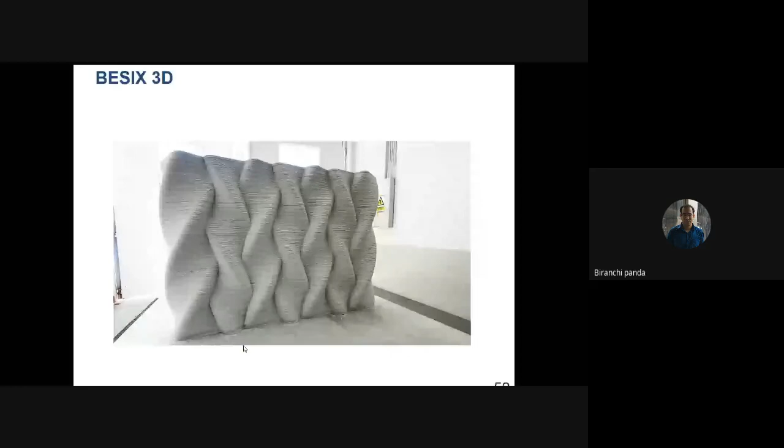Another company, BESIX 3D, shows the level of complexity they are bringing into construction using 3D printing technology, like furniture. Some companies, with the help of this technology, are now printing urban furniture like benches, tables, and showpieces for decoration purposes.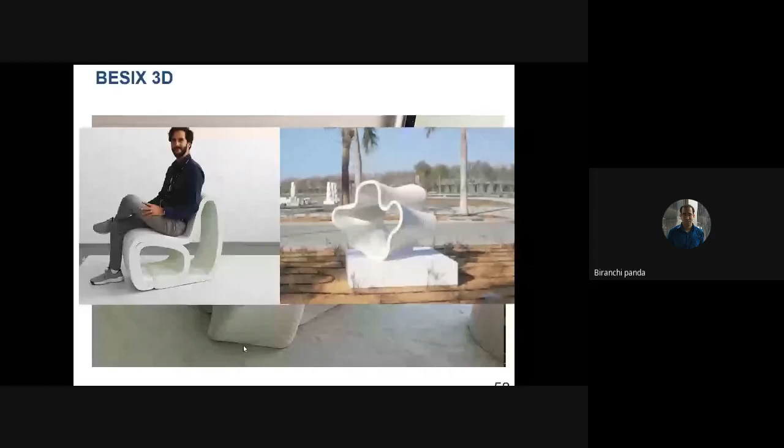This is the same company that claimed they can print a building in less than 24 hours. They are now expanding their business into many different continents, and this is one of their latest projects in the desert, where it's difficult to work day and night. They have a 3D printer that, without much human intervention, can print entire buildings using lattice structures.

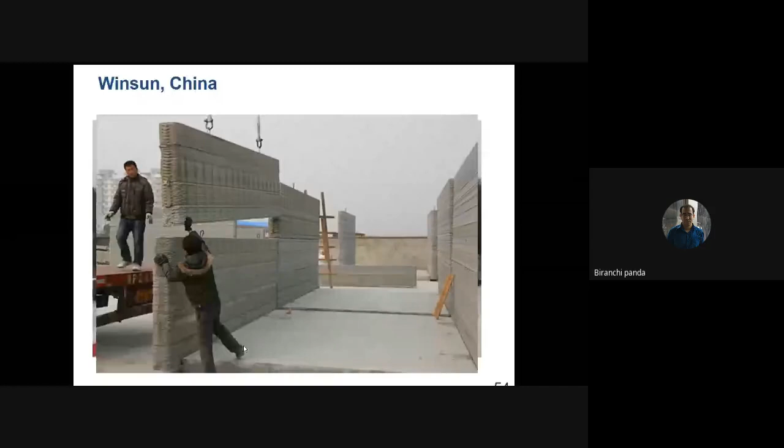In China also, they have printed 2-story buildings. They create those components in the factory, and once printed, they simply assemble them on site to erect the building structures. They have also printed many boundary walls using this 3D printing technology, using a similar approach of creating lattice structures in the design.

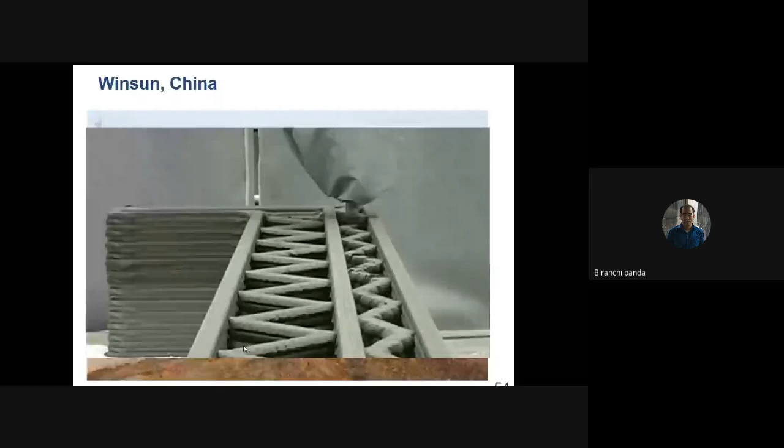During COVID-19, where there was a shortage of laborers, they printed isolation units using 3D printing technology because the technology is readily available and can work day and night without interruption. These isolation units were fitted with all the arrangements needed for a COVID patient, and they were shipped to different states.

This is the example I already mentioned, where this company printed a beam. As you can see, the cross section is not entirely solid—rather it has been optimized to save concrete, but it can still take the load of the application.

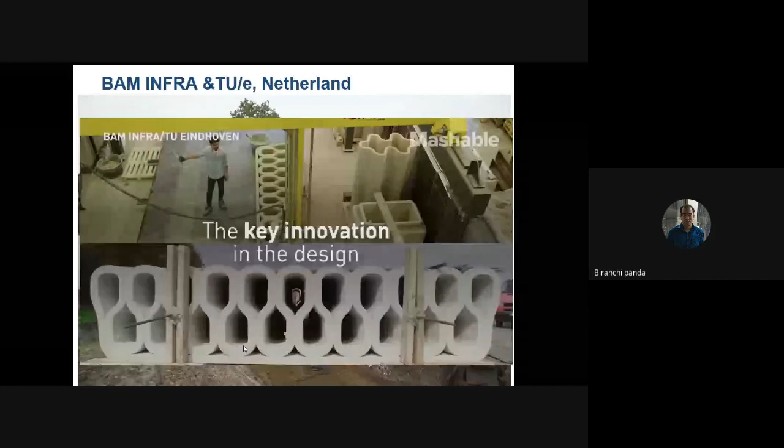The same company now, in a metro project, is printing staircases because staircase casting takes much more time. But with printing, once they have the CAD model, they can simply print it and install it on site.

Another company from the Netherlands is printing more complex geometries. As you can see, their application is to print facade elements for buildings—that is their core application.

The key takeaways from this presentation: if you want to develop a material, you need to ensure the material has thixotropic properties. Most importantly, the material, machine, and design are all interrelated in this process.

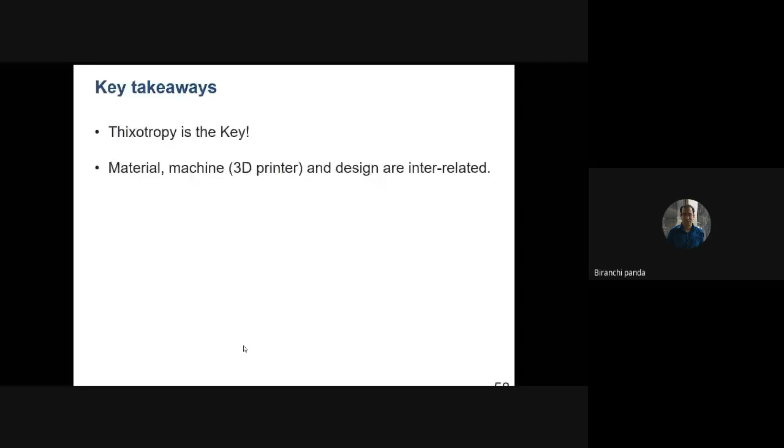There are some challenges still present in this technology because it is in a growing stage. We have some issues with reinforcement, structural testing is still missing, and we have methods that need to be developed for testing these 3D printed elements.

In terms of cost, a paper published just 2 years back says that when you want to play with digital fabrication, it is much more affordable when printing complex geometry. But if you want to print simple structures, the conventional way may still be acceptable.

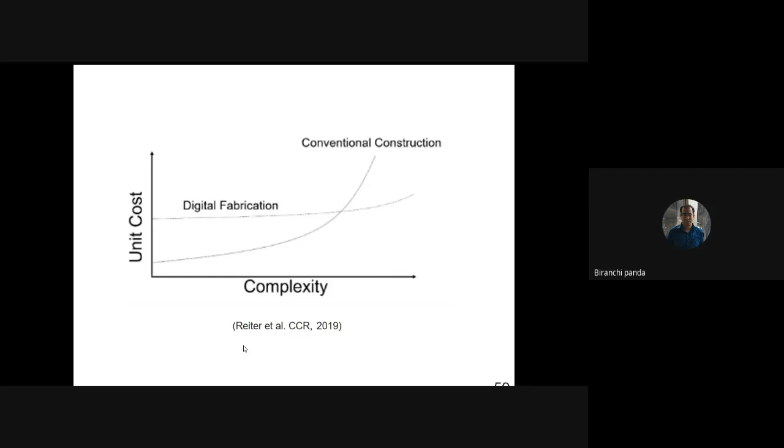Our approach is that in future we'll try to identify which components of a building can be 3D printed, and combine these two technologies so that we'll have a hybrid technology in the construction process—taking the help of conventional casting plus 3D printing to make buildings more affordable and timely available to many customers. So this is the example.

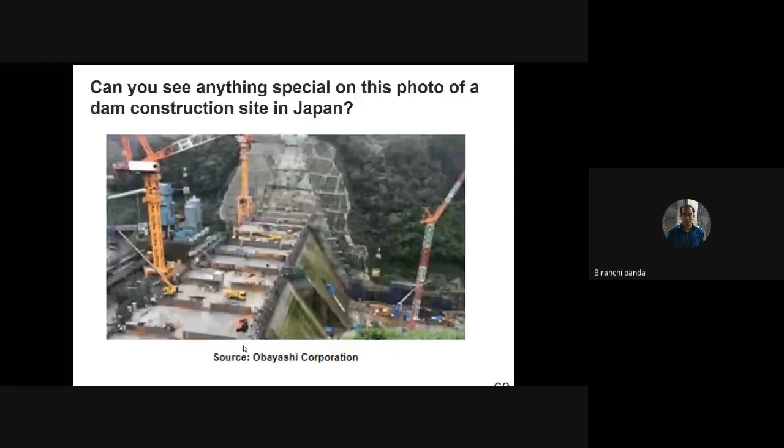When I was going through a news article a few days back, I found that during COVID time in Japan, they constructed a dam, and due to lack of workers, they used mostly robots in this process. They claim that by utilizing this robotic system or automation technology, they can save 30% of the building cost, and the timeline was reduced by 20%.